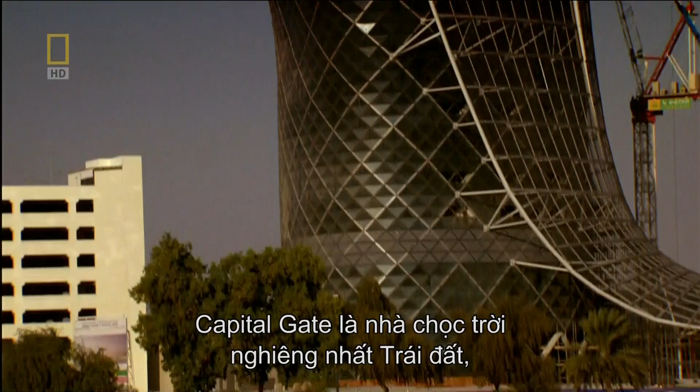Dubai is famous for its audacious engineering projects. But now, its neighboring city, Abu Dhabi, could surpass them all. This is Capital Gate, the most inclined skyscraper on the planet. It defies gravity, leaning at almost 5 times more than Italy's Leaning Tower of Pisa.

To make it stand up, it'll take some extraordinary engineering that could rewrite the skyscraper rulebook.

Situated on the edge of the Persian Gulf lies the Sheikhdom of Abu Dhabi. It's the largest and richest of 7 states that unified in 1971 to form the United Arab Emirates. Abu Dhabi is undergoing one of the biggest makeovers of modern times.

Its ruler, Sheikh Khalifa bin Zayed Al Nahyan, wants to join the City Super League. And he's spending over $200 billion to transform his capital into a world-class business and tourist destination. He's already spent a reputed $3 billion creating the most expensive hotel ever built.

The Emirates Palace boasts 114 gold domes and is the height of luxury, where rooms cost up to $12,000 a night. And that's not all. He's built one of the largest and most opulent mosques on earth. Capable of accommodating 40,000 worshippers, the Grand Mosque boasts the largest carpet on the planet and the world's biggest gem-encrusted chandelier. But even these structures have not quenched his thirst for the extraordinary.

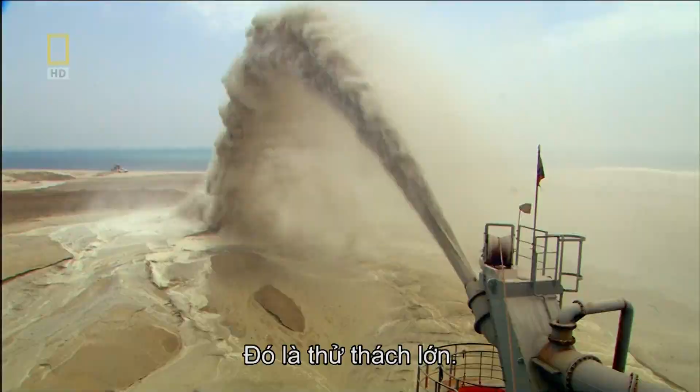It's a tough challenge. This is a land where extreme engineering is the norm. Neighboring Emirate Dubai has already built the world's tallest skyscraper, the 828-meter-high Burj Khalifa, and an iconic luxury hotel, the Burj Al Arab. Sheikh Sultan signs up a team of architects and gives them a clear brief, not to go bigger or taller, but to challenge the rules of architecture.

For Neil van der Veen, one of the concept architects, it's a unique opportunity. The spirit of the times in the UAE was that anything was possible. Really, you could do anything. We can do something in the architecture that will represent that Abu Dhabi is right at the cutting edge.

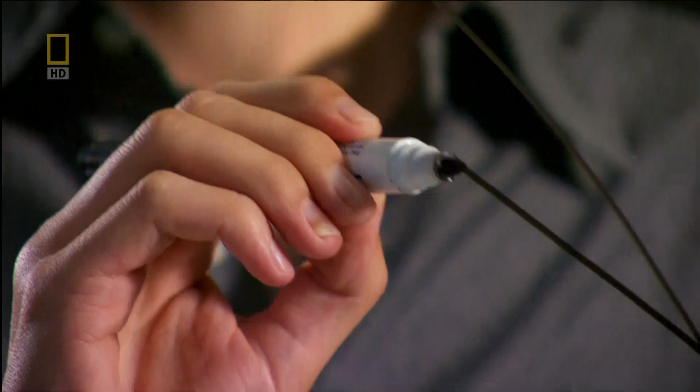The architects look for inspiration in Abu Dhabi's landscape. They find it in the wind-swept dunes and the rolling waves of the Persian Gulf. We took this idea of wind and water, which are both dynamic, fluid type of rhythms of nature, and we said, how can we capture those in time? As a result, you get a much smoother facade. I was really very happy when we first saw it, because with such a building, you get the first impression from the first few seconds.

The team come up with an extraordinary design. A tower that spirals out of the ground to 160 meters, inspired by a desert whirlwind and the splash of a wave rising over the sand. This gravity-defying skyscraper tilts almost 5 times more than Italy's Leaning Tower of Pisa. No single angle of this tower is the same as another. It's a structure guaranteed to amaze.

We really wanted this to happen. They could see a vision suddenly, they could see something that would stand for them. Then there was no stopping us. Sheikh Sultan wants the lower floors to become the most prestigious office address in Abu Dhabi, with the top 18 levels assigned as a 5-star hotel fit for royalty.

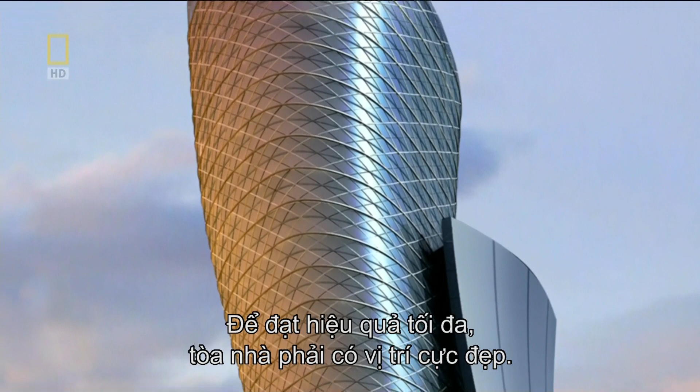But for maximum impact, this landmark skyscraper also needs a prestigious location. The Sheikh decides the tower will stand next to a monument of national importance, the Grandstand. Built by his uncle and founding father of the United Arab Emirates, Sheikh Zayed, it's used to this day for national celebrations. This monument and the skyscraper will link Abu Dhabi's future with its past.

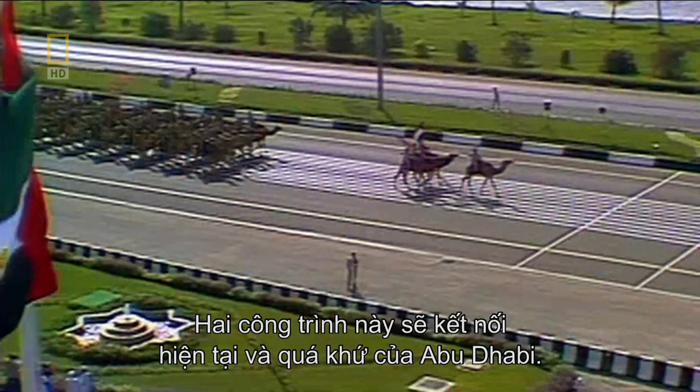Over the past 50 years, this land has experienced extreme change like no other. The discovery of huge oil reserves in 1958 set the wheels of progress in motion. Abu Dhabi's ruler, Sheikh Zayed, had a vision to unify the sheikhdoms and secure their financial future from Western dominance. He then set about using his black gold to create a city that rose out of the desert.

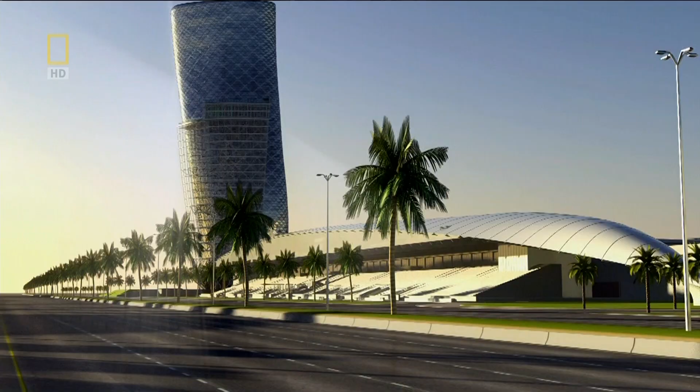Today, Zayed's legacy is all around, and now his son wants to leave one of his own. To transform Abu Dhabi once again, but this time to put it on the world map. Sheikh Khalifa plans a new $2 billion business district called the Capital Center, situated alongside the Middle East's largest business hub, the Abu Dhabi National Exhibition Center. It's the ideal location for an architectural icon. And inspired by its location, the new tower is named Capital Gate.

Now, the idea must make the leap from the drawing board to the construction site. The only problem is, no one has ever attempted a skyscraper like this before. Everyone realized that this is a crazy structure to build, and how are we going to build it?

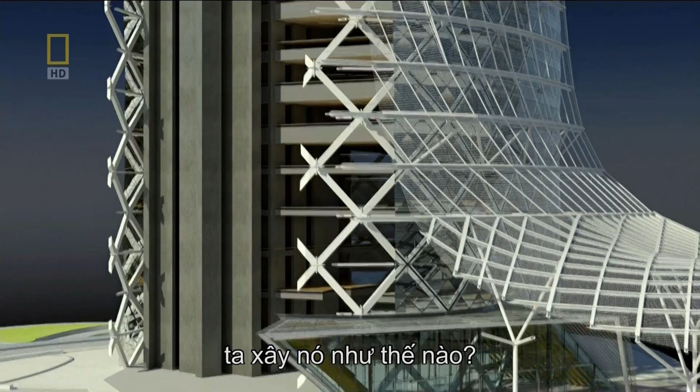To make Capital Gate's gravity-defying design a reality, it'll take some extraordinary engineering, and the challenge begins on day one. Its top floors overhang its base by 33 meters, creating huge forces that want to rip the building's foundations out of the ground.

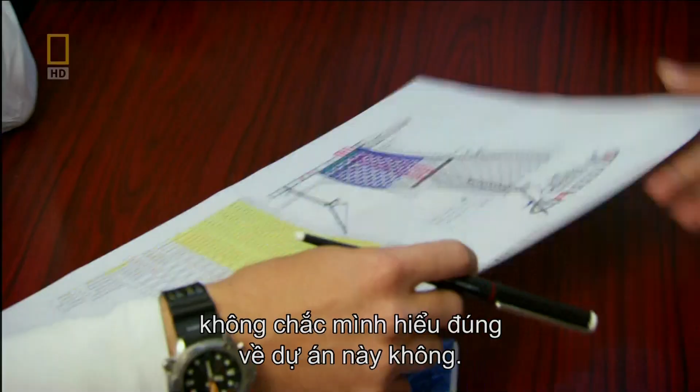At the construction site, project architect Tony Archibald is daunted by the task ahead. When I first joined the job, I was shown the drawings, and I kind of did a double take, and I wasn't quite sure that I got the correct understanding of the project, and it took me a few moments before I realized what we were about to undertake.

Keeping Capital Gate upright is a huge engineering challenge. There isn't just one solution. To overcome the forces of gravity, it will take a whole range of pioneering techniques. But the task starts with the foundations, deep underground. On one side of the building, the weight is going down into the ground. On the other side, it's being lifted out of the ground. And that's due to the large overhang that we're having to deal with.

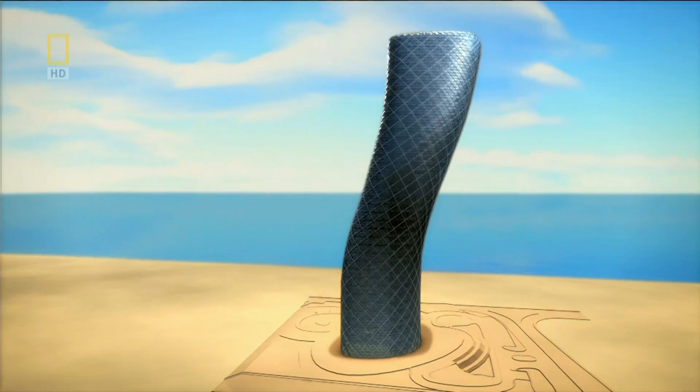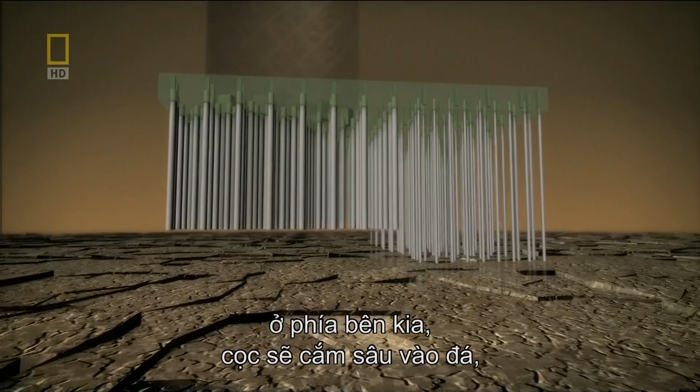The solution requires almost 400 concrete piles that work in 2 different ways. On the leaning side, half of the piles push the overhang's forces into the ground. On the opposite side, the remaining piles anchor deeper into the bedrock. They resist the stretching forces trying to wrench the building out of the ground.

Finally, to evenly distribute Capital Gate's forces into the piles, a deep concrete slab reinforced with steel is laid on top. What the foundations taught us is that every single aspect of this building has to be custom engineered.

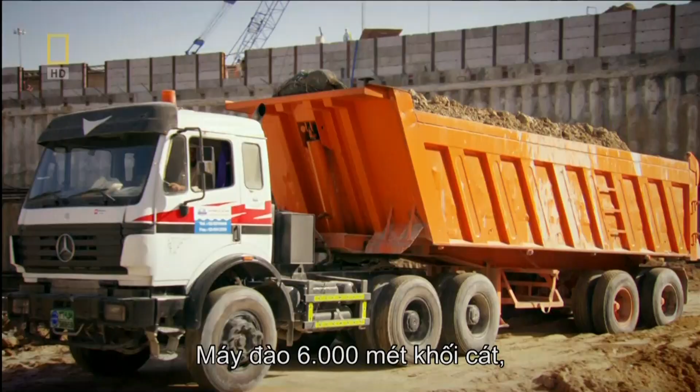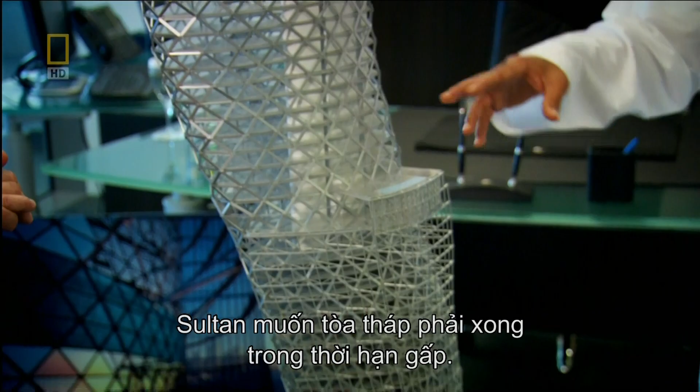Excavators dig out a colossal 6,000 cubic meters of sand. And over 8 weeks, hundreds of piles are driven into the ground. We had an awful lot of piles to put in at very close proximity. It was a real difficult challenge. There can be no let-up on this schedule. Sheikh Sultan wants Capital Gate complete by an impossibly tight deadline.

In less than 2 years' time, Abu Dhabi will host the World Future Energy Summit. Over 3,000 delegates from 50 countries and the world's press will convene at the neighboring Abu Dhabi National Exhibition Centre. It's the perfect opportunity to showcase Capital Gate and prove Abu Dhabi is at the forefront of innovation. But this gives the team just 24 months to design and build a unique skyscraper.

With the foundations finished, building above ground can begin. But because of the dramatic lean, it will have to be constructed in a very different way to a conventional skyscraper. We realised once we'd done the foundations that this was going to be the first of many difficult problems. A normal skyscraper requires a solid core to hold it upright. But Capital Gate's curves will just crack and topple a standard core. Engineers must discard conventional thinking and devise a way to defy gravity.

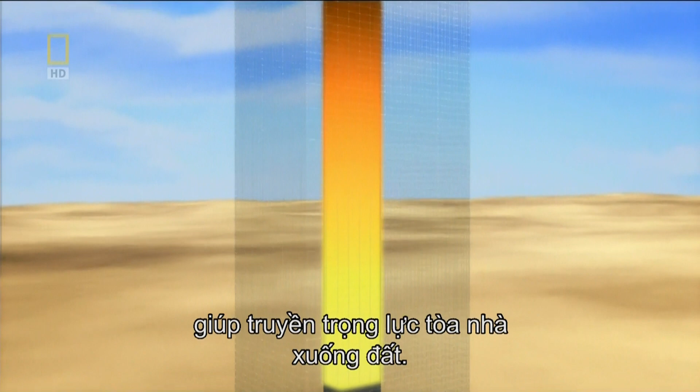Inspired by the nearby desert landscape and its wind-shaped dunes, architects have designed a curved leaning tower. But it'll take some audacious engineering to stop Capital Gate from falling over. Normal skyscrapers are built around a slim vertical core, which helps to channel the building's weight into the ground. There's so much overhang on this building that with a conventional core, there was no way it was going to work. You just can't build a straight core. It's just not strong enough.

Capital Gate's design would cause a conventional core to bend dangerously. The pull of the massive overhang wants to stretch the core on one side, causing the concrete to tear apart.

Structural engineer Mona Vassi knows it's a serious problem that must be solved. When I saw this one, I thought it's impossible, it's not going to work. It's just some sketch, somebody left it somewhere. But I always think that for the architects, it's easier for them to just draw something, but it's not easy for us to fulfill or satisfy their needs.

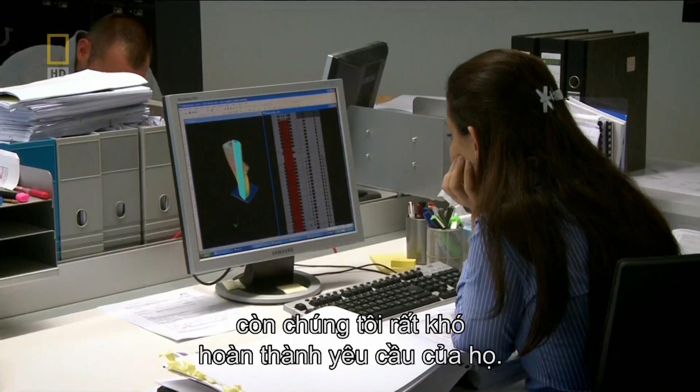The engineers developed two groundbreaking solutions. The first part of their plan is to build the core with a curve, bending in the opposite direction to the building's lean. As the structure grows, its weight pulls the core straight. In total, it shifts 350 millimeters, and the effect is significant. The concrete that would have been stretched by the overhang's pull will now be compressed and strengthened.

You build it bent, and then as you add the slabs to the upper levels, it pulls it back into vertical. So basically that whole vertical core is in compression, and that gives it immense strength.

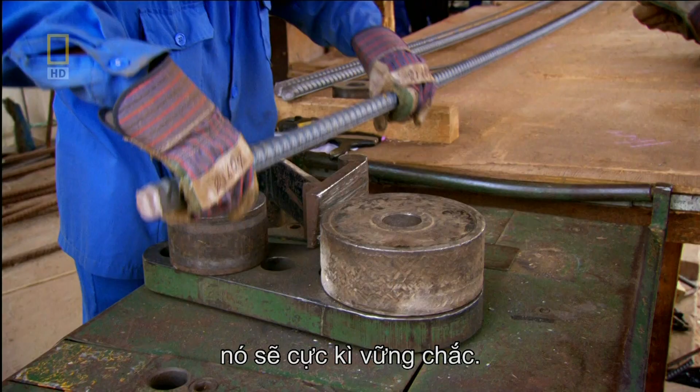The core grows 4 meters a week, and construction manager Les Fairchild is in charge of building it. This is probably the most complex core that I've come across. It's built at an angle and effectively the core holds the whole building up. The core is built using a technique called jump forming.

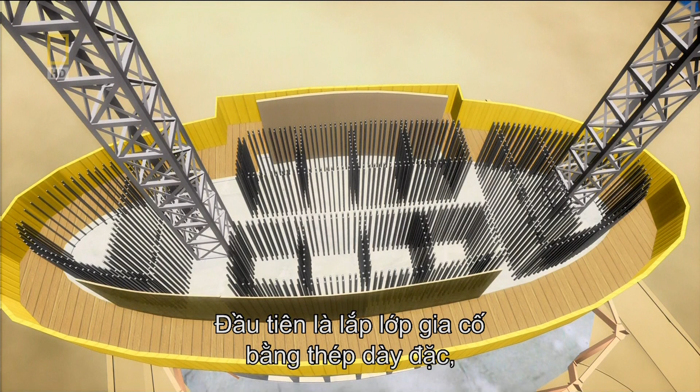First, a dense mesh of steel reinforcement is assembled. A mold then closes around the steel to form the shape of the core. The steel mesh is then filled with concrete. Then the mold or form can climb up the core wall for the process to start all over again.

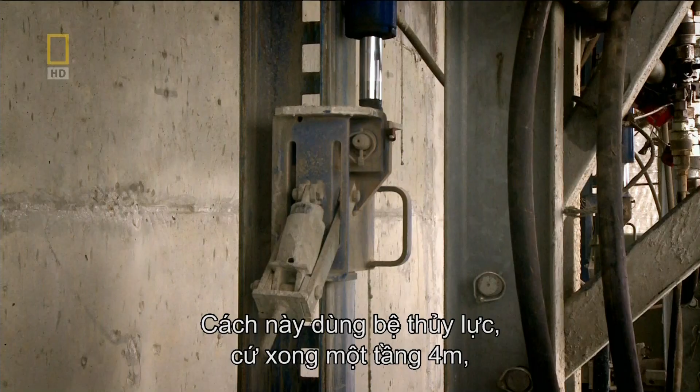Jump form is a hydraulic platform. Once we've cast each 4-metre level, we simply attach it to some runners and we jump it hydraulically up to the next level. The core will be strengthened as it straightens. But for the core to carry extreme loads, the concrete must be reinforced using steel rods called rebar.

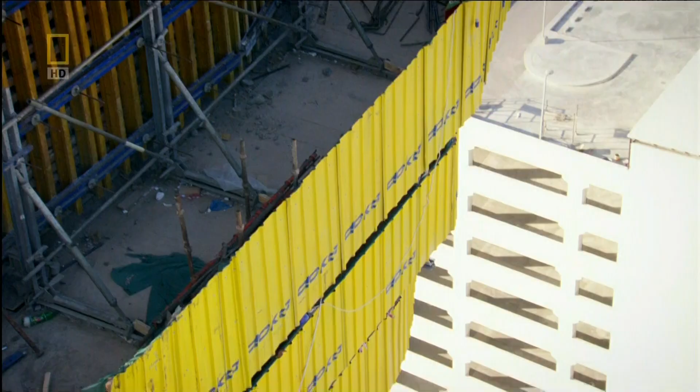The rebar is installed during the daytime, but temperatures of up to 50 degrees Celsius and concrete don't mix. It dries too fast and could crack. To set at the right speed, the concrete has to be poured during the cool of the night. As the core grows higher, the liquid concrete has to be pumped over longer and longer distances. So the consistency of every batch is first checked in a slump test to ensure it won't block the pipes.

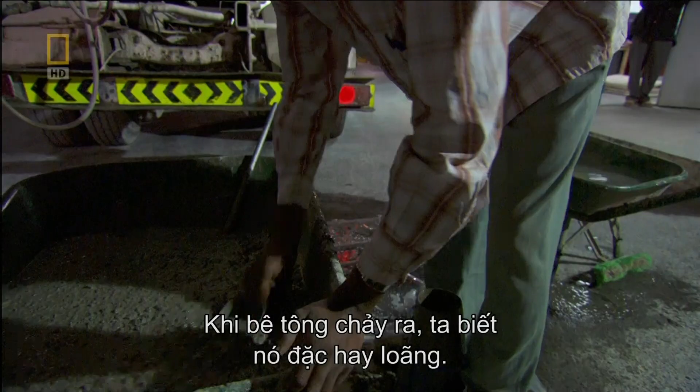When you first see it coming out the wagon, you can usually tell whether it's a tight mix or whether it's a loose mix, and that's what we're testing for really in the slump test. We simply make a cone, lift the cone off, and depending on how much it reduces in height, tells you exactly what the slump is. The one we've just witnessed is 215 millimetres, which is within the specification, so that's good to go.

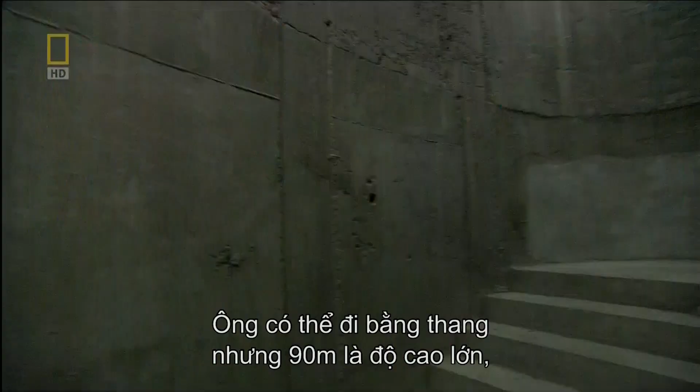Whilst the truck drives to the pump, Fairchild needs to get onto the core. He can take the stairs, but 90 metres up is a long climb. He knows a much faster way. Crane lift.

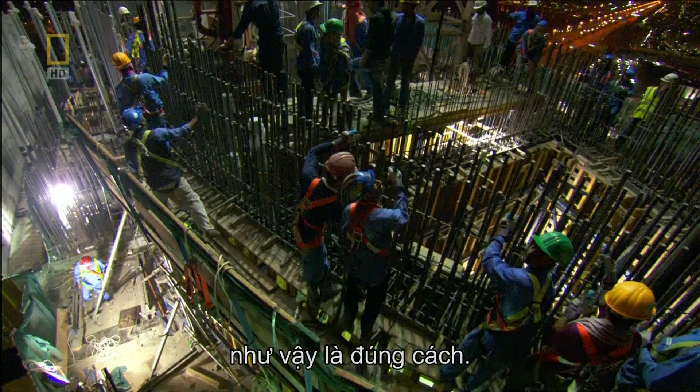It's going fairly well. We've had a nice continuous supply of concrete, and we're now pumping it up to the upper levels of the building. And the lads are just steadily working away. They actually work from one side to the other in metre deep layers, so they're doing everything right. It's always exciting when we pour concrete. It means it's another achievement really. We're going up another level.

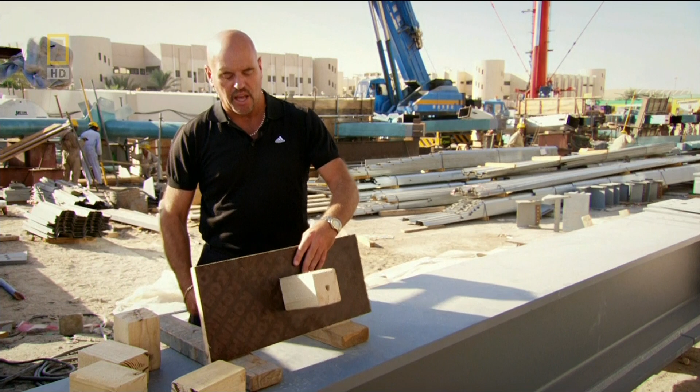But building the core out of alignment and packing it with rebar still isn't enough to stop gravity toppling Capital Gate. What we came up with is a post-tensioning solution where we introduced much more reinforcement into the core wall and then used the tensioning process. Basically that was done by introducing high tensile strands to the centre of the walls. When we reach the designated height, we simply apply tension.

We're actually stretching the tendons that fall through the wall and we're actually pulling them tight, and that's done by a tensioning machine. So effectively what you would have when the tension is complete, when the load was applied to the core would stay intact and the additional reinforcement would prevent it from falling over.

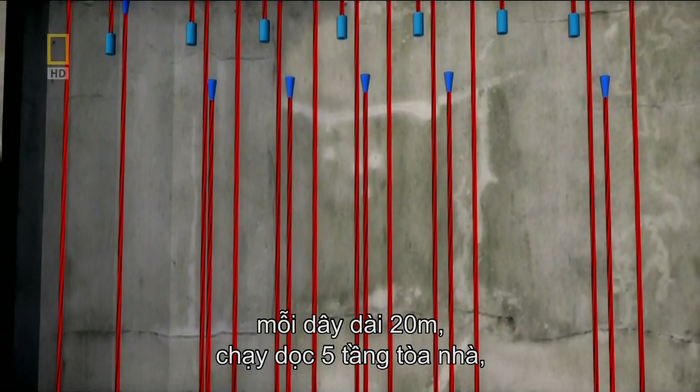To post-tension the core, 146 steel tendons are threaded vertically through the concrete. Each tendon is 20 metres long and runs through 5 floors of the building, overlapping each other for maximum strength. When the tendons are stretched, the stress counteracts the pulling force created by the massive overhang, stopping the concrete from tearing apart. Okay, stop. Okay, start moving.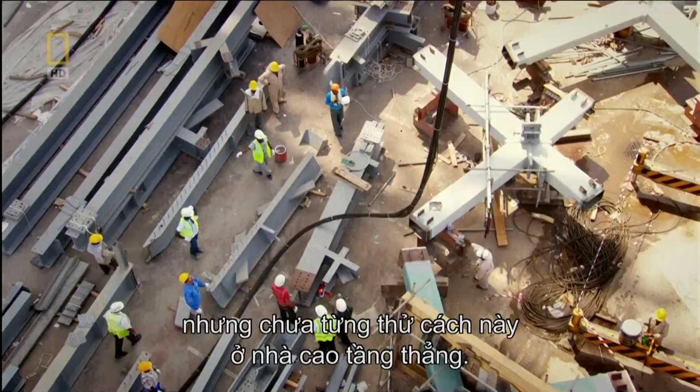On site, the team are post-tensioning the core. But no one has ever attempted this vertically in a skyscraper. The long tendon is lifted to the top of the core. The team used the steel tendon's weight to force it through a duct already cast through the core. Once the tendon is in position, the team lock off both ends, ready to tension its individual strands.

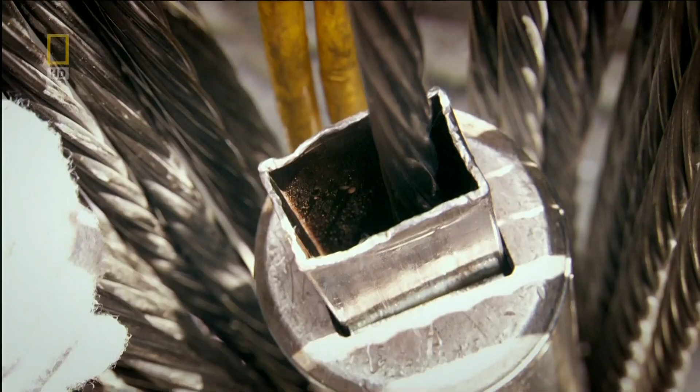A hydraulic jack clamps around one strand at a time and stretches it. It's equivalent to about 5 family cars pulling on one end of the rope. With the steel tendon now stretched to the right stress level, concrete pouring can continue upwards. The quantity of cable that's been used is approximately 120 tons and 120,000 meters in length. It's about 44 times the Golden Gate Bridge. This process is repeated over and over and means the core should withstand the huge loads generated by Capital Gate's extreme overhang.

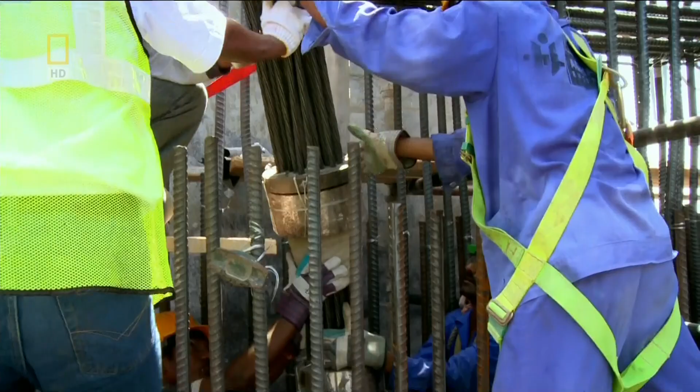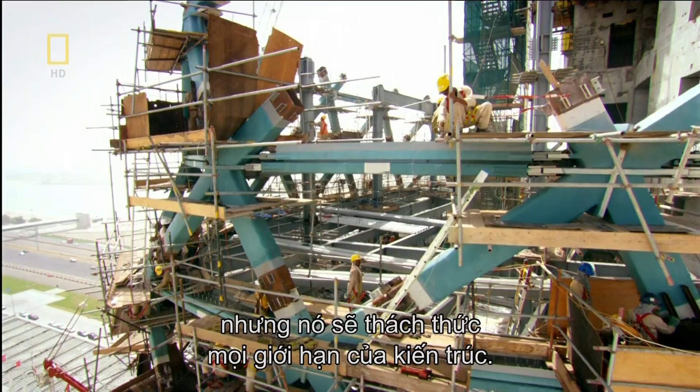But now, an even greater challenge must be tackled. The building's twisting, leaning design must somehow be turned from theory into reality. And once again, it'll mean bending the rules of architecture.

To create Abu Dhabi's architectural icon, Capital Gate needs an exterior curved leaning frame. But once again, the building's extreme tilt creates a problem. The shape of the building with this very pronounced overhang meant that traditional skyscraper building solutions just weren't going to work. There was no way. The building design requires it to be thin to maximize floor space and allow for huge panoramic windows.

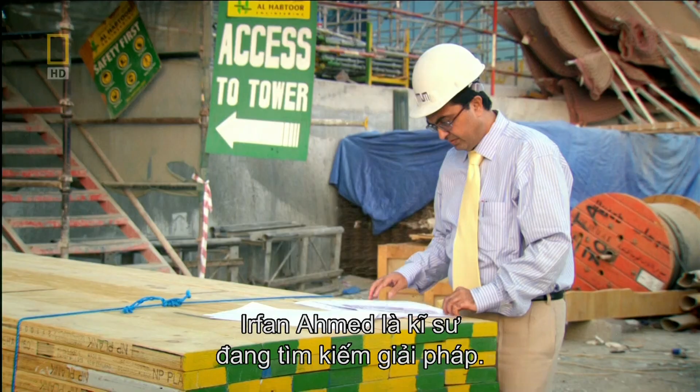Irfan Ahmed is one of the engineers who has to find a solution. For structural engineers, it's always challenging to accept the architectural requirement, you know. They always want thinner and thinner and thinner. Surprisingly, the humble egg could help with this engineering dilemma. It is essentially a skin of structure around the outside of the building, not unlike an egg.

An egg can withstand huge loads because it evenly distributes forces down through its shell, which means the shell can be thin, creating more space inside. So it's very, very thin, it's very, very strong. If I try to crush this egg, you can see that it's actually amazingly resilient. So let's see how resilient.

Here I have 170 eggs laid out, and we're going to put load on top of these in the form of breeze blocks. Moment of truth. So far, so good. Each one of these blocks weighs 15 kilos. So we've nearly got half the weight of a car on here now, on our 170 eggs. Let's see how far we can push this.

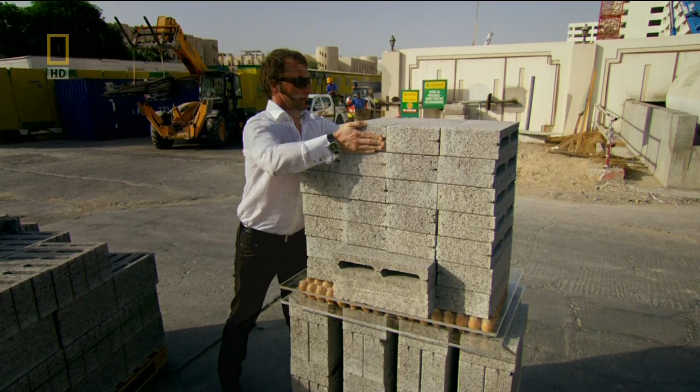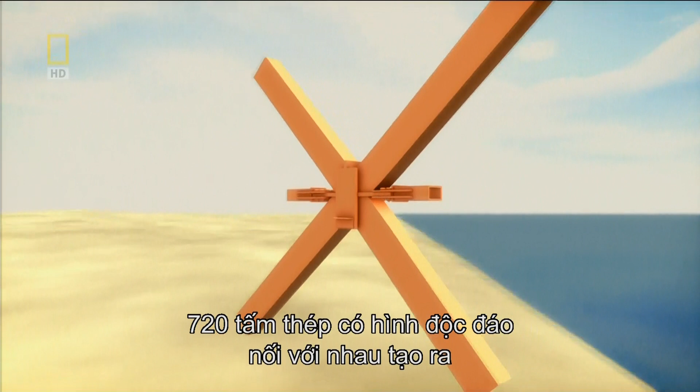Capital Gate can't channel forces with eggshell, but it can use the principle of how it works, using a diagrid. A diagrid is a giant mesh of steel that wraps around the core. Steel beams connect to a node or joint to form a cruciform section. 720 uniquely shaped sections link together to form the thin but immensely strong diagrid. Working together, these cruciforms equally distribute the forces down the outside of the building.

The way it does that is by making a uniform net, so that the forces are very evenly distributed, and that means that we can get away with slenderer sections. On site, a team of 240 steel fabricators assemble the diagrid. They've built the easier straight part of Capital Gate's base, but now the structure is starting to lean, making installation even more challenging.

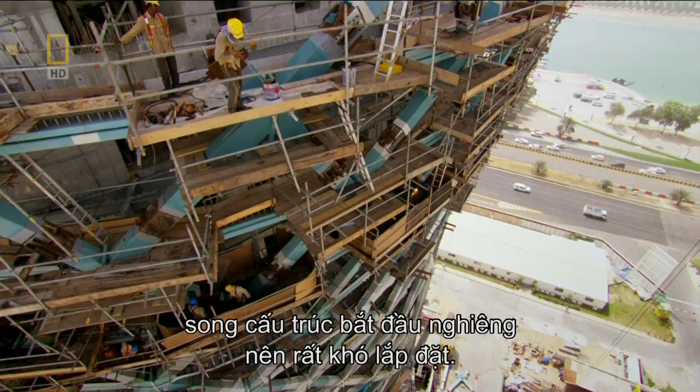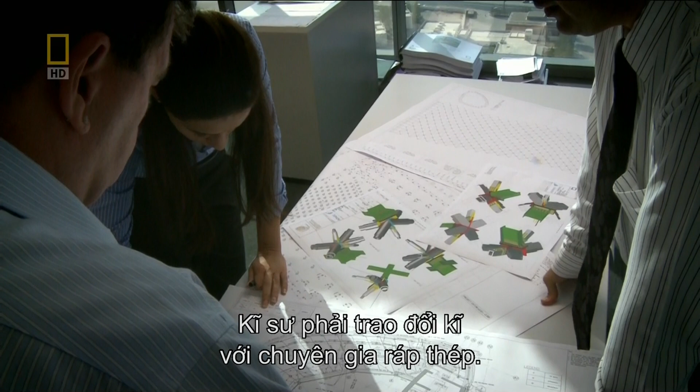Each cruciform, weighing up to 16 tons, has a unique geometry and must be crane lifted at a precise angle. If the diagrid is not assembled with millimeter accuracy, the mesh will not channel the loads and the structure could be weakened. The engineers must communicate closely with the expert steel fabricators. They design and manufacture the diagrid 150 kilometers away in the neighboring emirate, Sharjah.

Here, cutting-edge construction is the norm. They've built one of Malaysia's Petronas Towers and Dubai's iconic skyscrapers, the Burj Al Arab and the Burj Khalifa. But Capital Gate's revolutionary design pushes even these experts to the limit. On the planning floor, project engineer P. Bhaskaran and his team need bespoke 3D software to tackle the building's highly complex diagrid. The 3D modeling is done, and any unforeseen criticalities will be very clearly identified in the 3D model.

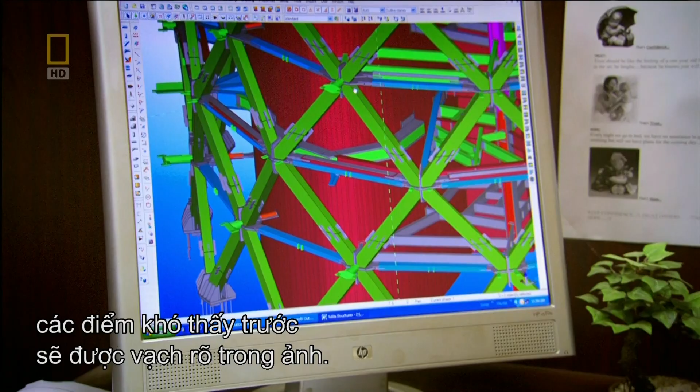Each one of the 720 cruciforms is precision engineered, not only to channel huge forces, but to connect with millimeter accuracy to the neighboring cruciforms and the glass facade. But to measure their exact angles, the team used some old school technology: chalk. It might look unsophisticated, but it's highly accurate, ensuring all the elements will join together.

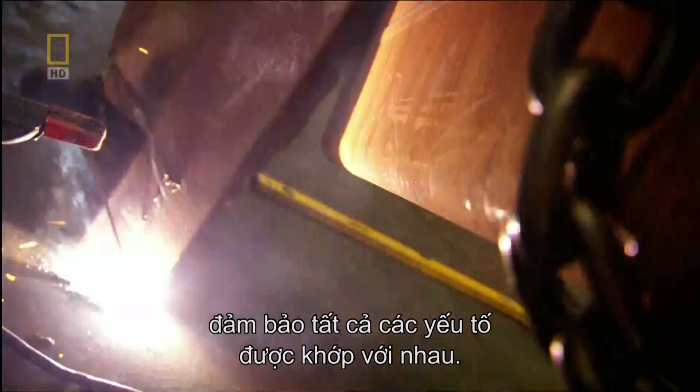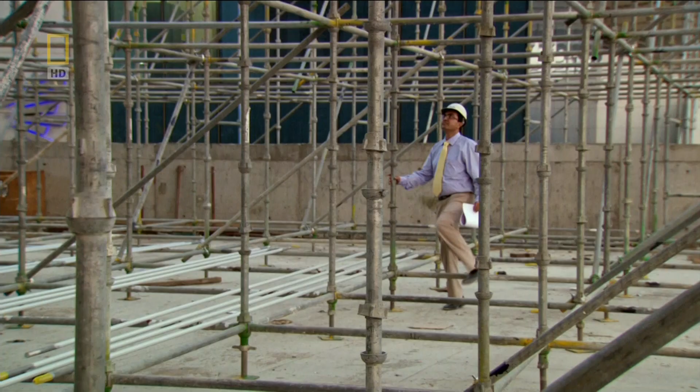To keep up with construction, the factory must produce 18 cruciforms every week. Constructing such a huge building, and a critical building within the short span, without working 24 hours, it is absolutely not going to happen. As the skyscraper reaches new heights, the long hours start to pay off. This design pushes the diagrid technology to its absolute limit, and in fact far beyond what's ever been achieved so far. Even in your dreams, you're thinking about this project. So once you see the structure coming up, you forget all the long hours you spent and all the sleepless nights.

A colossus is fast emerging from the Abu Dhabi sands. Now, this leaning tower must be clad with a glass facade. And as always with this gravity-defying structure, it's going to require some revolutionary engineering.

Glazing Capital Gate's leaning curved frame is a major problem. Covering its unusual contours with curved glass will blow the budget. So the skyscraper's curves must somehow be clad using cost-effective flat glass panes. Fortunately, ancient Greek geometry can help.

Because you've got a complex shape, it's an organic shape, it's a curved shape, the only way to model that with straight lines is to use triangles. Triangular panes can pivot in 3 directions, and when joined together can cover complex geometric surfaces. But because every angle of the building is unique, it'll take 26,000 triangular panes to form the facade.

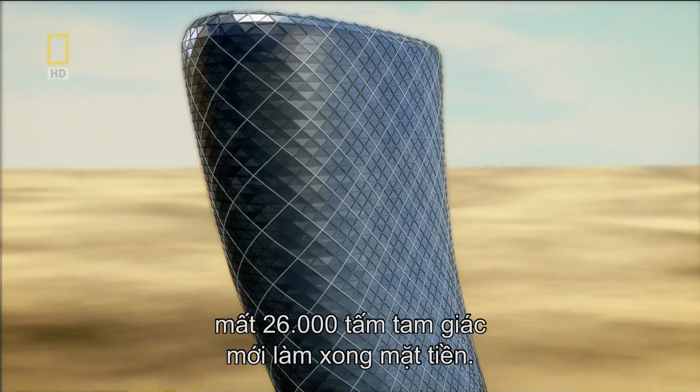With so many glass triangles to cut, the local glass factory springs into action. Each pane is scored by an automated diamond cutter to an exact pattern. The triangles are then sent along the production line. The team is under constant pressure to deliver enough glass to the site. Hey, this side, 2 guys, hold it.

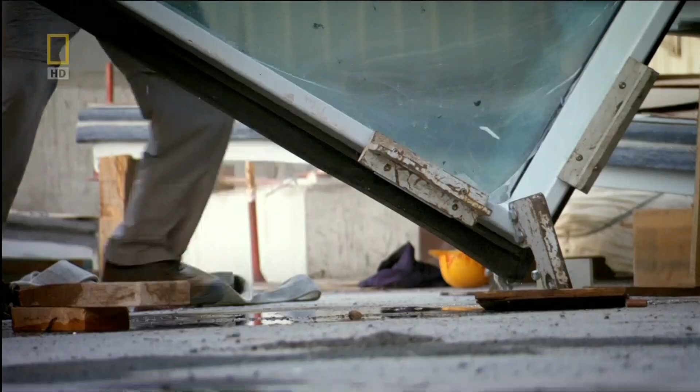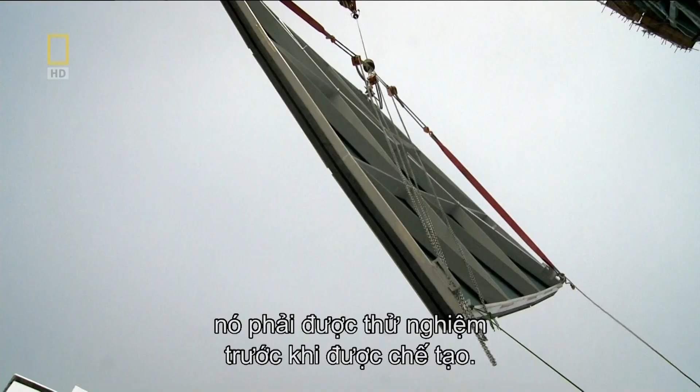After several weeks, 8 diamonds are in place and another 100 standing by. But the glass design is so unconventional, it still has to pass a number of tests to prove it's up to the job. Because we'd already started the glass installation, the results of this test were absolutely key. Each panel is stacked one upon the other. So if we'd had any kind of problem, we would have had to unstack them, which would have had disastrous consequences for the program.

This is no ordinary glass skin after all. Capital Gate's core straightens as it grows. The skyscraper will not stop moving until after completion. Normal glass facades can accommodate minute movements caused by wind and temperature changes. But to stop the glass shattering and keep the building watertight, the panels must be designed to shift by up to 20 millimeters. The scale of that kind of movement is almost unheard of in glazing systems. It's a vast amount of movement.

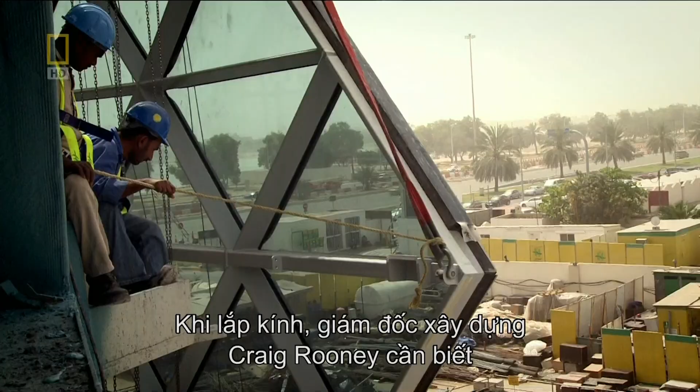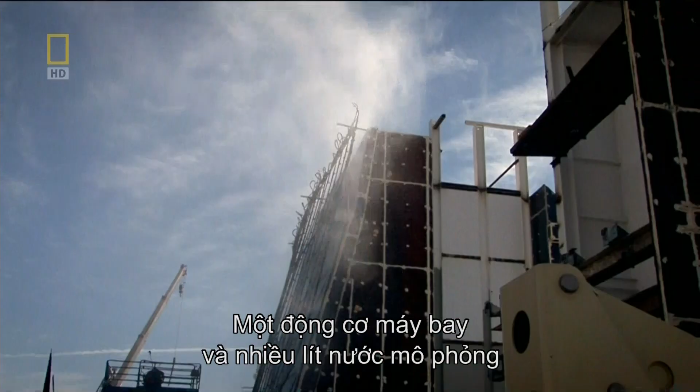With glass installation ongoing, construction manager Craig Rooney needs to know the panels will perform. We don't want to get to the top, we've done it, we've installed it, we think we've done a great job, and then it all leaks. The panels must be tested to the limit at an Abu Dhabi laboratory. A plane engine and many litres of water simulate worst-case scenario weather.

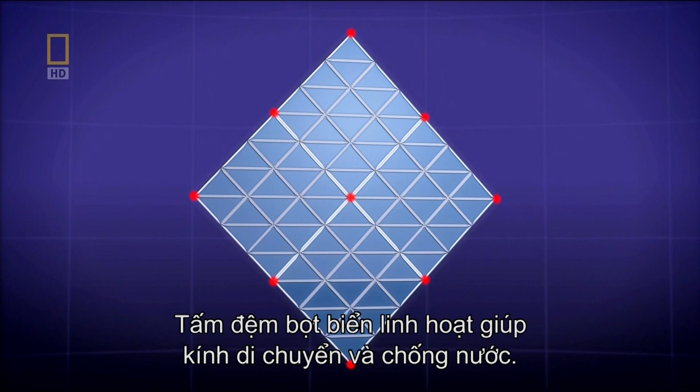Now the moment of truth. Any leaks could be a disaster. And it's bad news. The first time we got a full water test, we had a leak. The fact that we had a leak was devastating to the whole team and very alarming. The diamonds connect to each other by a bespoke two-layer seal. The flexible spongy seal allows the diamonds to move and keeps water out. But if any water does seep through the outer seal, drainage tubes fitted at intervals let the water flow away.

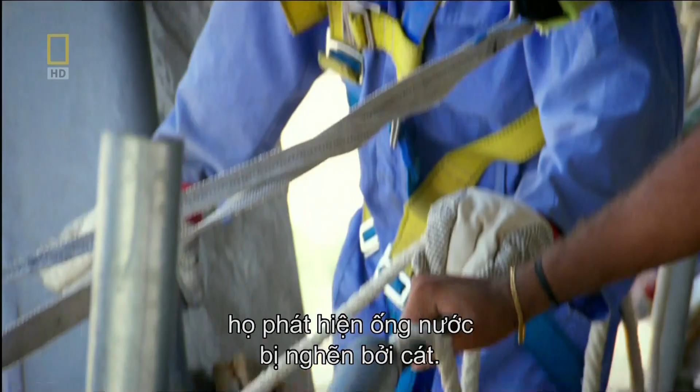The panel has failed the test. Water has flooded inside and penetrated the inner seal. If it was a fundamental failure, we're back to the drawing board, so the cost and the budget and the program all go completely out the window. The panel is examined. Answers are needed fast. Fortunately, it's not a design failure. They discover a drainage tube is only blocked with sand. The problem resolved, installation can step up a gear.

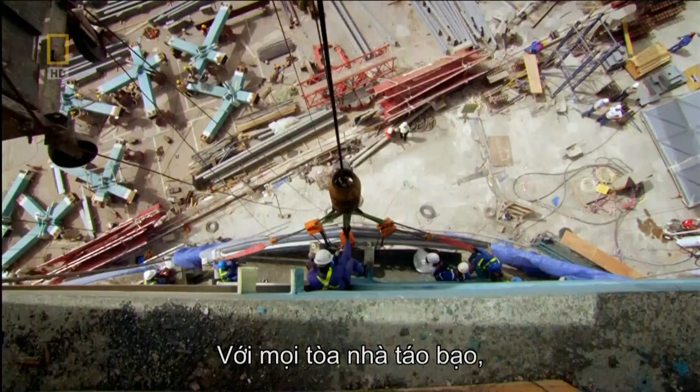But as always with this audacious building, one problem is solved and another is just around the corner. To give Capital Gate's five-star hotel lobby the wow factor, architects again plan to push the design to the extreme. Now they want to build an infinity pool and a restaurant, hanging 100 meters above the ground.

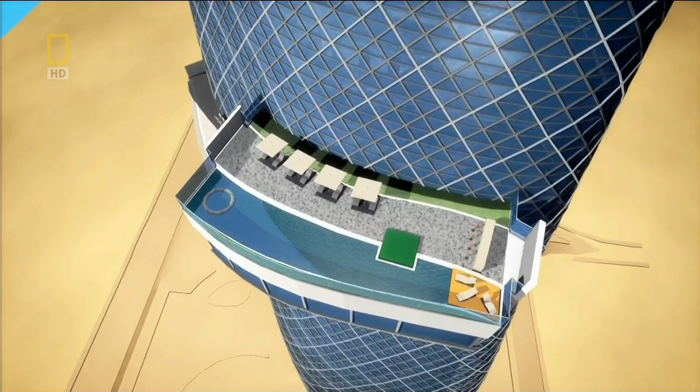18 months into the build, Capital Gate's design is about to give a new slant on high-rise living. The architects want a pool deck and restaurant suspended in the sky, but it's an engineering headache. There's so many requirements that architects have that really put us in so much trouble as engineers, but you want to make sure you have a safe structure.

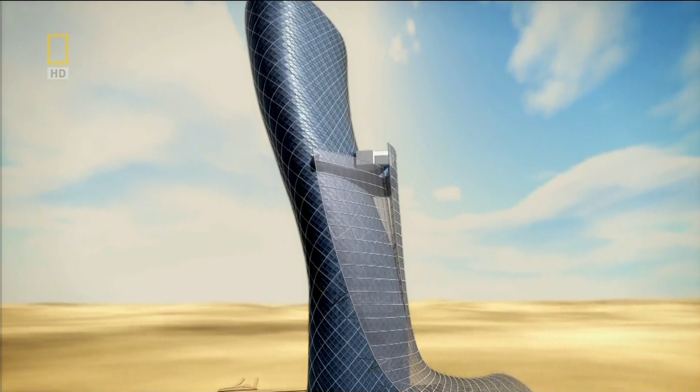The design calls for a two-story extension, hanging without any visible support. But the pool's water alone will weigh 150 tons. The structure's huge mass means it needs reinforcement. We needed some supports from below, otherwise there was no other solution. I don't think you can have a cantilever that huge on this building, no way. The design will only work if it's underpinned with 22 steel struts. They will carry the loads back into the building. But the struts must also look delicate to meet the architect's aesthetic demands.

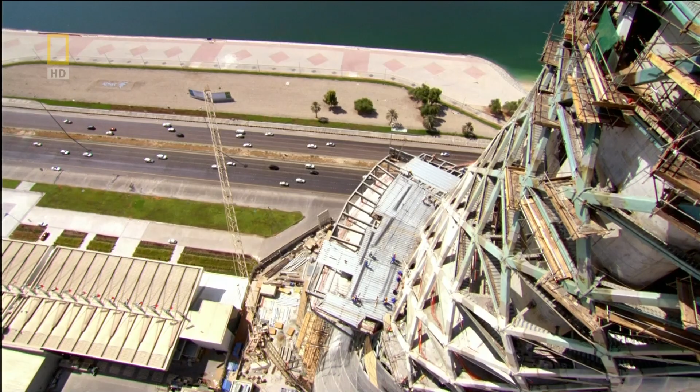On the construction site, 90 meters up, the pool and restaurant is taking shape. All of its structural elements are in position, except one. The team are raising its last 6-ton floor beam.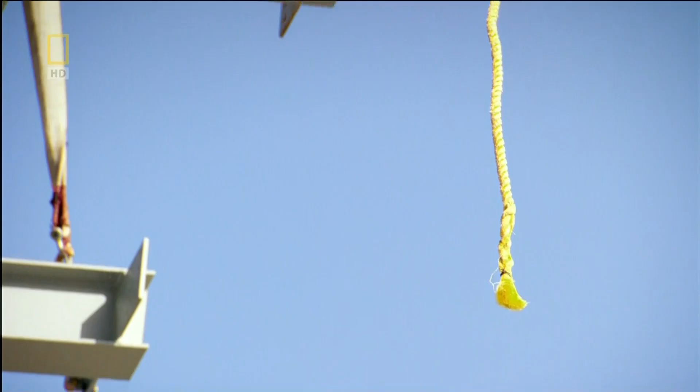It's taken many crane lifts, but one of the highest suspended swimming pools in the world has made the leap from blueprint to building. See all those lines that you just drew? They're actually drawing the same thing for you, but with a crane. But the feeling is indescribable.

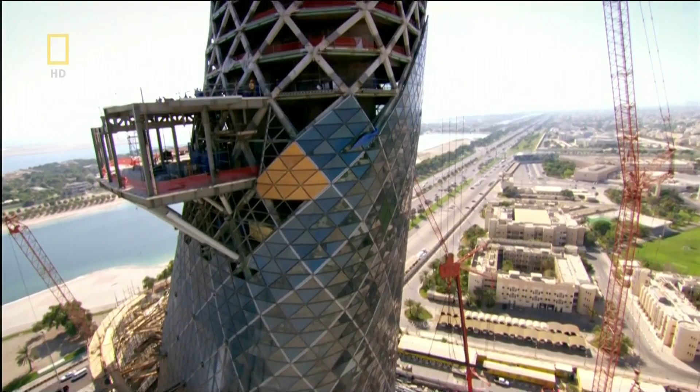And the structure's muscular struts and connections are also elegant. The idea behind these junctions is that they behave like the insects that can walk on water. They're sufficiently light that the surface tension keeps them above the water. So these little brackets dissipate the forces from all that weight.

Capital Gate is fast becoming an Abu Dhabi landmark. But the taller it gets, the more the weight of its upper floors is a problem. The skyscraper needs to go on a diet. And this time, the architects come up with a clever solution. The building has lots of visual surprises.

And one of the most important ones of those is the internal atrium. It's a kind of a light well that brings light from the sky deep inside the building, and it extends over half the height of the building. So it starts out very, very small at the bottom and opens out in a big funnel. This cavernous hole is good news for reducing weight and minimizes forces.

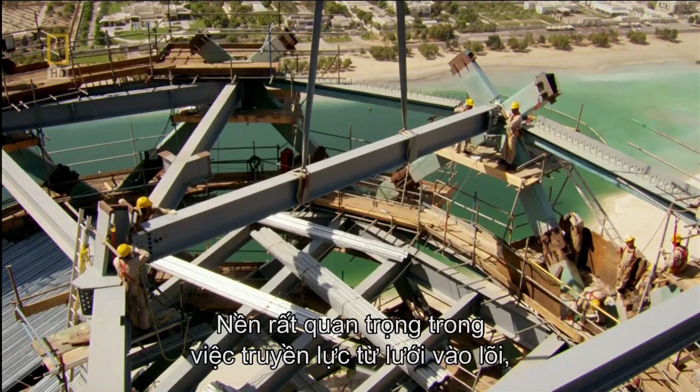But the atrium is a double-edged sword. The floors are critical in transferring loads from the diagrid to the core. A giant hole through 18 floors means these loads must find another pathway. It's a very, very big hole in every single floor plate. So our engineers really had their work cut out.

You don't want to have an opening in your floor. You want to have more concrete, reinforced concrete, to transfer these forces. The forces need to flow away. And the solution is pioneering. An internal web of steel mirroring the external diagrid. This is the first time we've ever heard of this being done.

The internal diagrid is actually a fundamental part of the structure. This funnel-shaped internal skeleton carries the forces of an 18-story building down to its tapered base and into the core. But the loads are extremely high for such a small area. To stop the atrium punching through the core wall, the concrete needs protection.

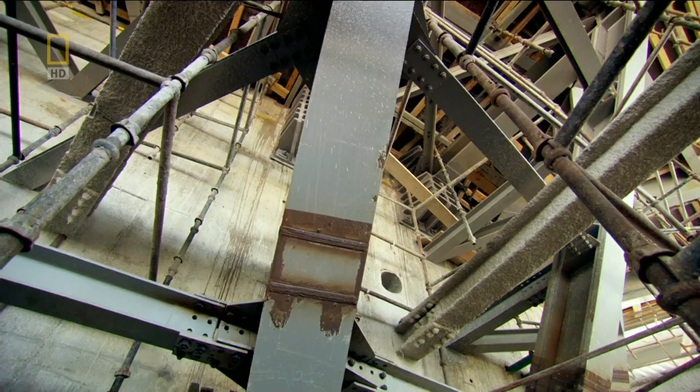The answer? 6 giant plates of steel that brace the connection to the core wall. The connections are really a wonderful, wonderful piece of engineering. They're 8 meters high. They span 2 floors and they connect back into the core. The atrium's near completion brings Abu Dhabi one step closer to achieving an iconic landmark.

But as the sun goes down, this isn't the only celebration underway. On site, the Indian steel team are holding an annual blessing to the Hindu god Lord Vishwakarma, the protector of architects and engineers. Their livelihoods depend on staying safe, and although they use safety equipment and are highly skilled, working with huge sections of steel at height is never risk-free.

We pay our respect to God and get the blessings from the God. We do that for the safety of all our workers and for the proper completion of the job. Every trade of workers we take, the basic tools they are using on site, that has to be just kept in front of God, and the workers, they feel themselves that they are in safe hands. The tools are now blessed, and the steel team's morale is high.

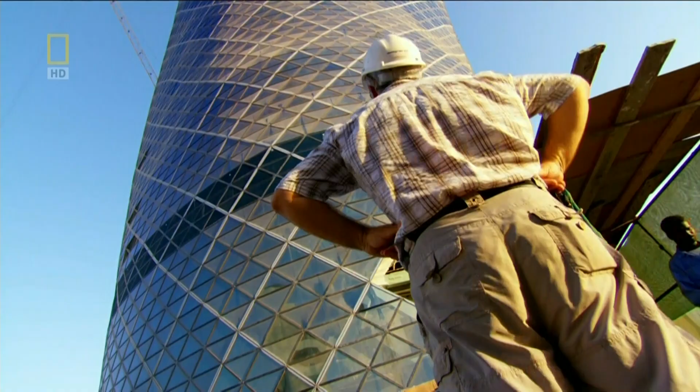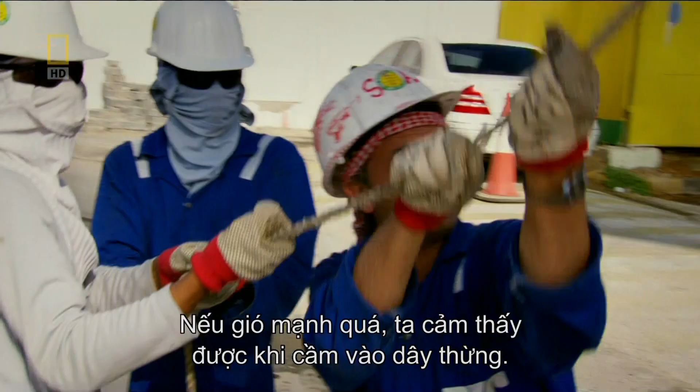But the glass installers, lifting diamonds to over a height of 100 meters, are getting the wrong kind of lift from Abu Dhabi's highly unpredictable wind. If the wind is too strong, then you can feel this in your hands when you hold these diamonds by rope. I always get nervous if I see the panel starting turning. And this makes me always a little bit afraid when I see diamonds going up and starting moving.

Meyer has to act quickly, or this 4-ton diamond could smash into the building. Not for the first time, lifting glass is delayed by changeable weather. At this rate, Meyer won't install the remaining 107 panels in time. But Abu Dhabi's wind isn't the only problem the Capital Gate team face. A last-minute design request comes in from the Sheikh's office that could have serious implications.

With just 6 months to go to completion, the Capital Gate team should be on the home straight. But those plans may have to be put on hold. I had a telephone call saying that we had to put a helipad on the roof, which I didn't think was a joke, but I was astounded that we got this at such a late point in the project.

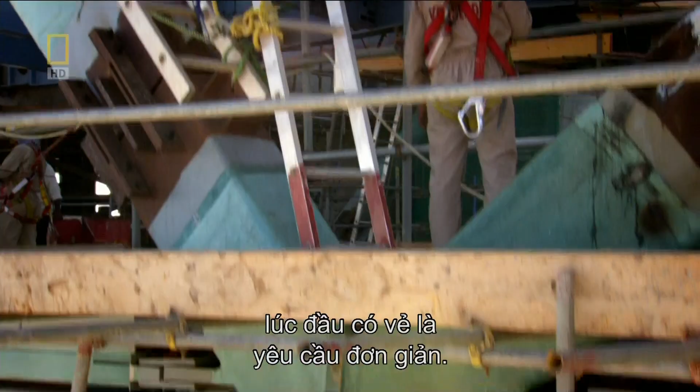Integrating what will be Abu Dhabi's highest helipad atop one of the world's most daring skyscrapers at first seems a simple request. But it actually poses 2 serious problems. It'll create new forces that must be absorbed by the already strained core, and unpredictable wind flows that can cause potentially lethal flying conditions. You get a thing called wind shear, tipping the whole helicopter onto its side, and this is a very real and very dangerous risk.

These rapid wind changes, known as wind shear, can affect the lift on helicopter blades. Aircraft can be blown off course, or literally fall out of the sky. There is no way that we could have any margin of error on the safety. The only way we could predict what the wind shear would be like on the top of the building was to model it in a wind tunnel.

In London, England, a scale model of Capital Gate is put through its paces in a high-tech wind tunnel. Just as the team fear, within seconds, wind shear conditions appear. Air currents are flowing over the top of the building, but then separate from the surface, spiraling inward to form a region of turbulence.

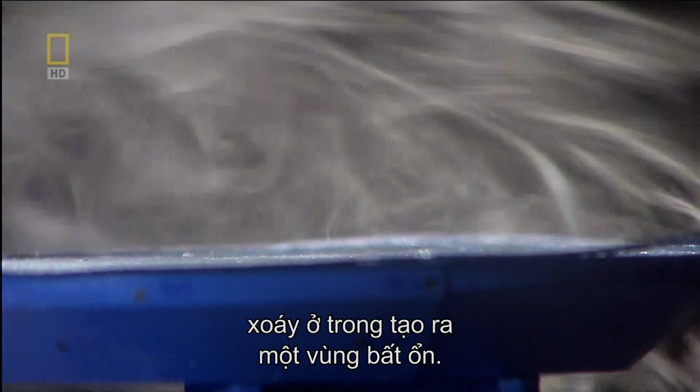Wind engineer Leighton Aurelius knows the consequences could be serious. If the pilots lose control in this random ball of energy here, they may in fact end up crashing onto the helideck, or even worse, onto the tower itself. I'm sure that can occur. But that's not all the wind tunnel test reveals.

Wind impacting the helipad is also creating huge suction forces. We're talking about very large forces here wanting to pull the helipad off the top of the building. Something in the realm of several large trucks or big rigs trying to pull this helipad away.

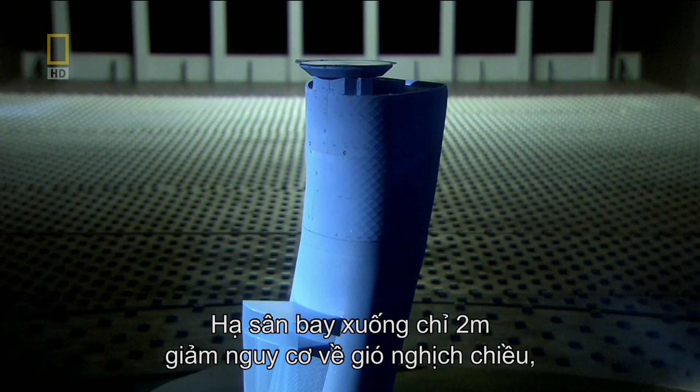To make the helipad safe, Aurelius and his team have to go against conventional thinking. We didn't think that lowering the helipad was actually going to be the optimum design, but we see reduced loading on the helipad as well as safer conditions for the pilots to land in. Lowering the helideck to just 2 meters above the roof dramatically decreases the wind shear threat and means Capital Gate's core will withstand the additional loads.

We're relieved, frankly. The tests have actually confirmed now that we can actually have it in our original design position, which is very low, which will mean that the profile on the skyline is exactly where we want it. But it'll take another 5 months to just draw up the helipad's blueprints, and a crane must be left behind to build it.

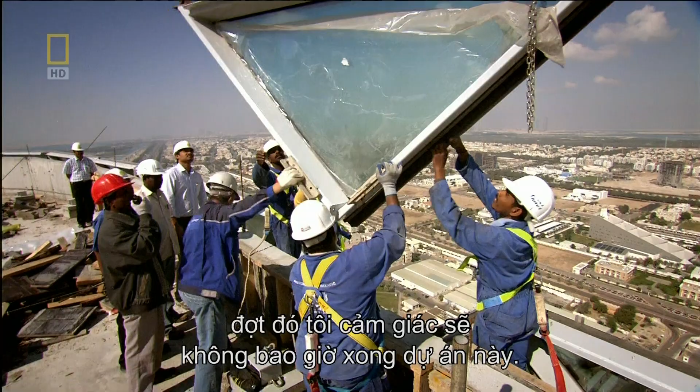Now, with only weeks to go until zero hour, the team are installing one of the last glass panels. It's a moment that once seemed a long way off. In my office I have a plan of all the diamonds we have to install, and in the beginning it looked like I'm in jail and I'm marking the wall with marks for each day. And so at first I felt I never will finish this project. Just 10 months since the first diamond was fitted, the facade now shimmers in the sun.

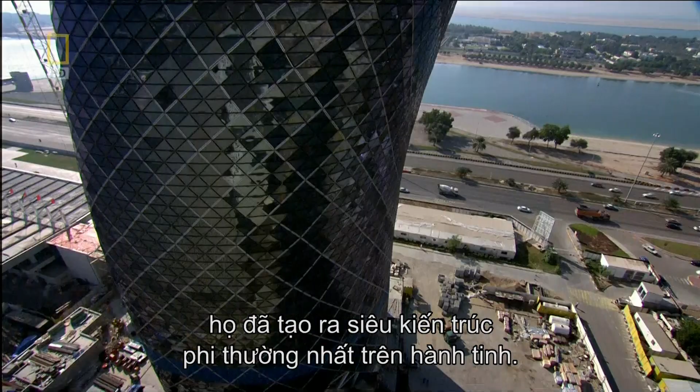Capital Gate's internal fit-out will take another year. Only then will its 5-star hotel and Abu Dhabi's most unusual office address be open for business. But against the odds, the team have created one of the most extraordinary megastructures on the planet. Capital Gate twists and spirals out of the ground, soaring to a full 162 meters. It's taken nearly 6 million man-hours to construct, and its overhang is spectacular.

You see the building and you stand underneath the overhang. It's extremely impressive. It's a fantastic feat of engineering. I feel as though I've been here an eternity, but it's probably been the quickest 2 years of my life. It's been an amazing journey and we've learned so much. And actually I think we've demonstrated that some things that looked impossible or even ridiculous were actually possible.

And Abu Dhabi's past will soon be physically linked to its future by a wave of steel that'll rise over the grandstand and splash up the skyscraper's mirrored glass. Abu Dhabi is a fascinating part of the world to be at the moment. It says to people we can step outside of the box. We don't have to follow the rules.

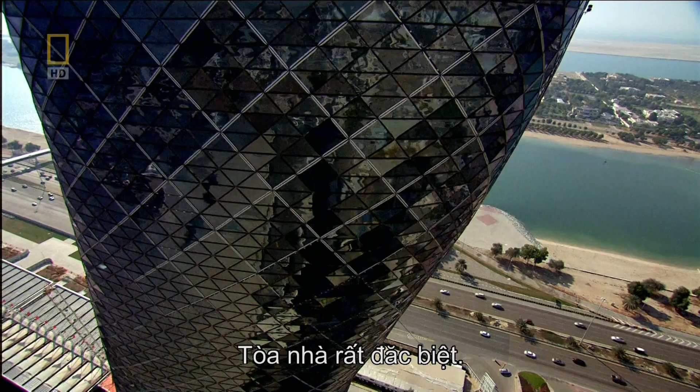With the 2010 World Future Energy Summit just weeks away, Sheikh Sultan can be sure Capital Gate will show the world what Abu Dhabi is capable of. This building is really iconic. It catches the spirit of Abu Dhabi and will be part of the postcard image of Abu Dhabi. The team have achieved what some thought was impossible. A leaning tower that claims the world record for the most inclined skyscraper on Earth.